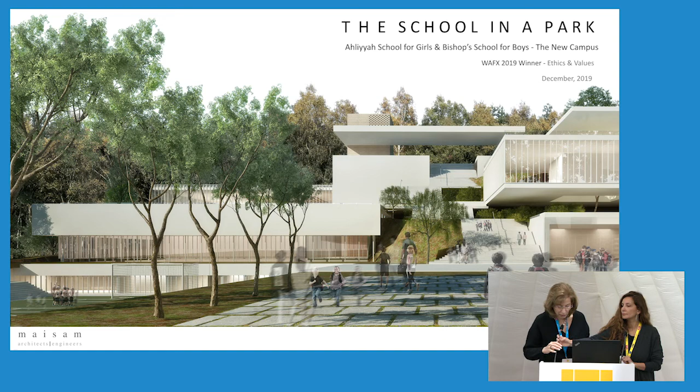It's a merger between two schools in Amman, Jordan: the Ahliyyah School for Girls, and the Bishop's School for Boys. The main driver behind the design has been to create a school that is ahead of its time, aspiring to look into a school of the future that will be the first of its kind in Jordan, and probably in the region. We would like to see how that will take us into future schools.

The two schools hold a significant presence and historic value in the city, as they represent beacons of holistic education and symbols of empowerment. The two schools currently sit in one of Amman's oldest neighborhoods called Jabal Amman, the Mount of Amman.

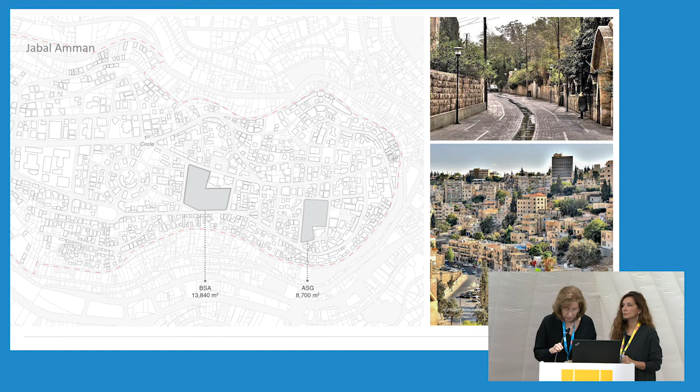The area represents a lot of culture, history, and authenticity with a traditional dense urban fabric, while the new site sits 15 to 20 minutes away within a rural part of the southwest of the city.

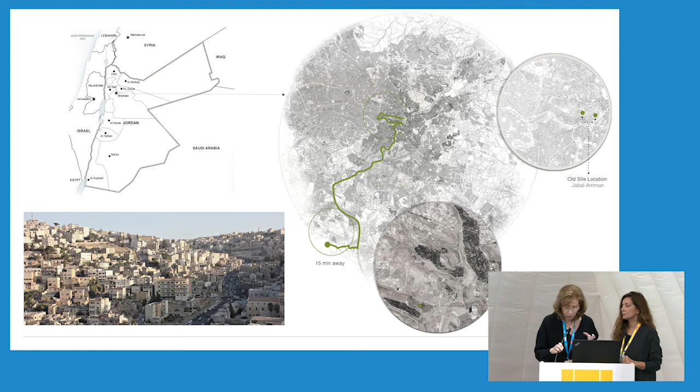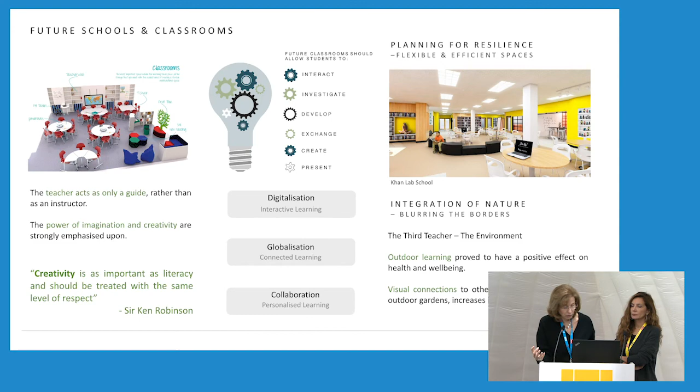We were very lucky to have been approached by a forward-thinking client that is enlightened, bold, and considered a reference in the field of education, believing in instilling the power of imagination, creativity, and collaboration, and considers the school's built environment to be the third teacher, one that allows students to interact, investigate, develop, exchange, and create.

So why are we moving? We are moving to unite the boys and the girls' schools away from heavy traffic in the old city, and to provide a lot of open space.

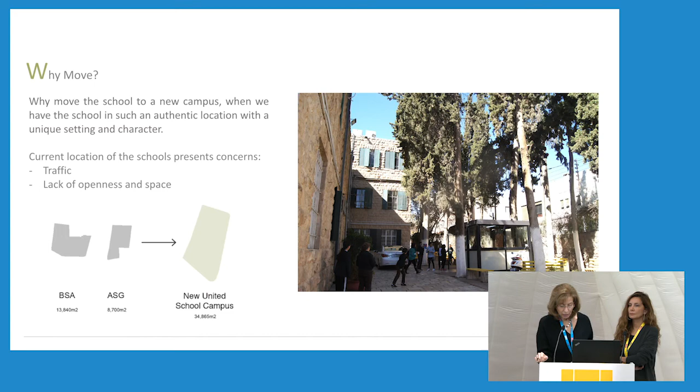One of the main challenges was the emotional attachment of the school's community to the current campuses. So we gave them a promise to maintain the school's identity and values, design a school of the future, create a school in a park, a school the students will call home.

Taking with us the basic physical elements that are engraved in the memory of the place: a stone wall, a tree, a staircase, and a courtyard.

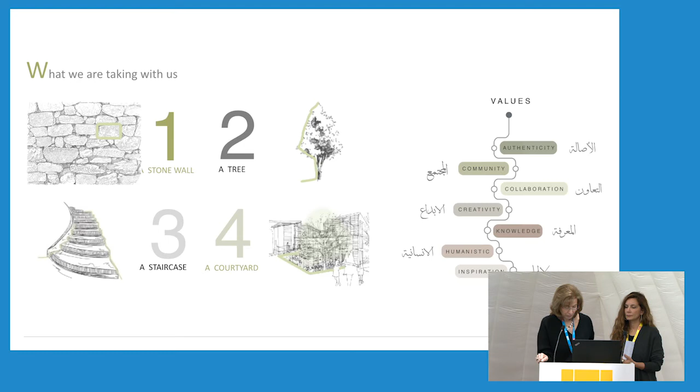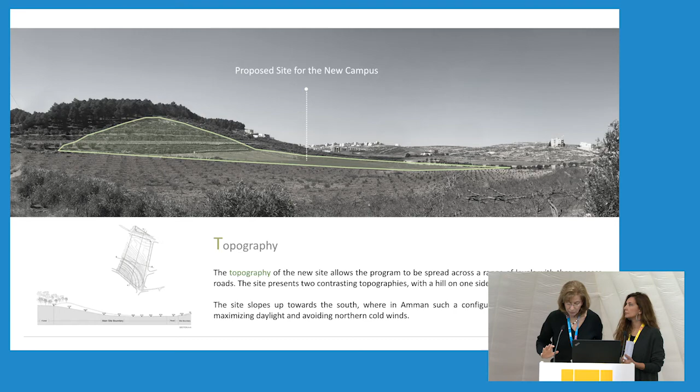The topography of the new site is rather intriguing, as it offers two distinct areas. One is almost flat, while the other is extremely steep with a backdrop of forest pine trees.

The required space program proved to be quite disproportionate to the site area, especially if we were to provide ample open space.

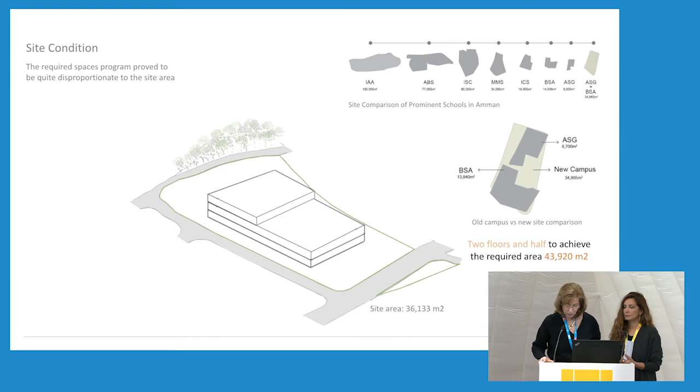We started with spreading the program across the site, introducing pillars that behold the values of the school, elevating the program to draw in the surrounding greenery.

We then broke down the mass into modular courtyard masses that become pods of knowledge that house learning spaces, classrooms, etc., introducing jewel-like transparent spaces in the park that showcase the freedom of expression and innovation.

The pillars of values became the cores that hold and connect the school throughout, to create a school in a park.

So the elements again: we have the park that weaves together an intricate landscape of creative interactive functions, and the pillars symbolizing the solidity and values that the school represents.

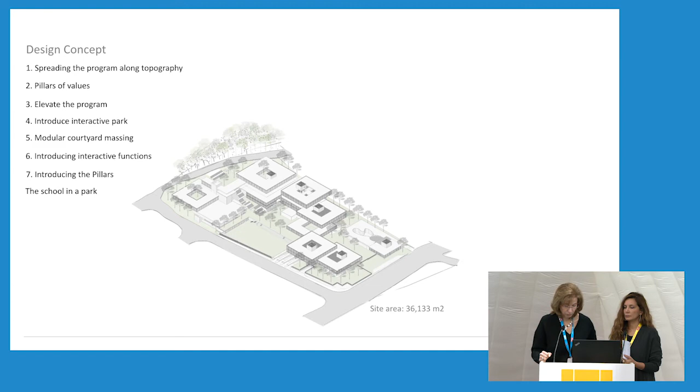The elevated pods of knowledge, and the anchors rooted within the mountain, housing the school administration and all community-related functions. We believe that we were able to create an environment that engages the students, stimulates their imagination, and nurtures their passion.

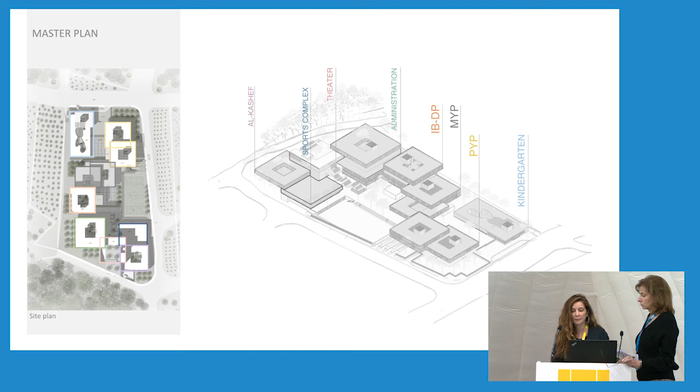The program splits into two categories. The first are the learning functions, mainly the classrooms of the different departments within the elevated pods. The second are the interactive functions placed within the park, creating an environment that lights the spark of curiosity.

These functions are the library, the theater, the design labs, music rooms, art studios, and playing fields.

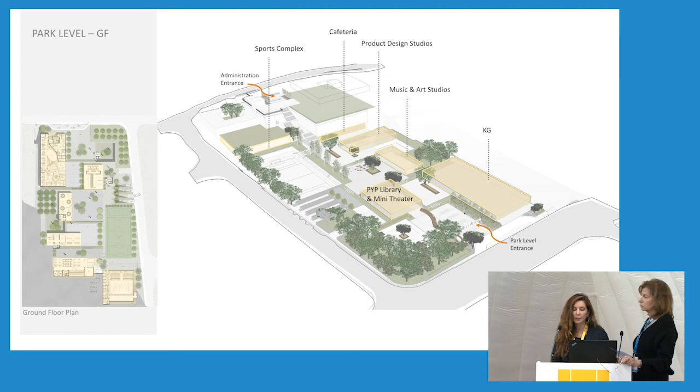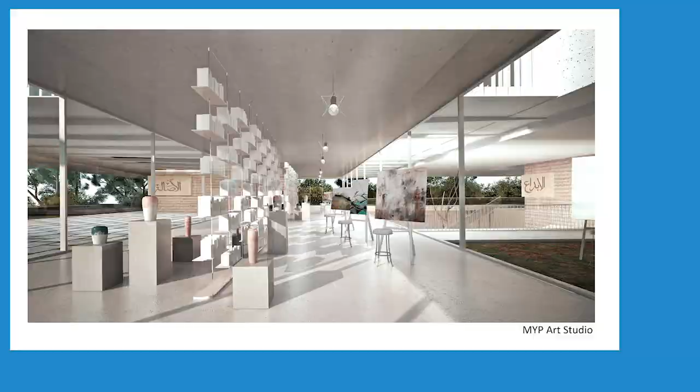Like all parks, it connects you with nature, it connects you with others, and gives you the space to connect with yourself. As you go through the park level, you will witness art being created, products being designed, theater being performed, even students grabbing books from the library.

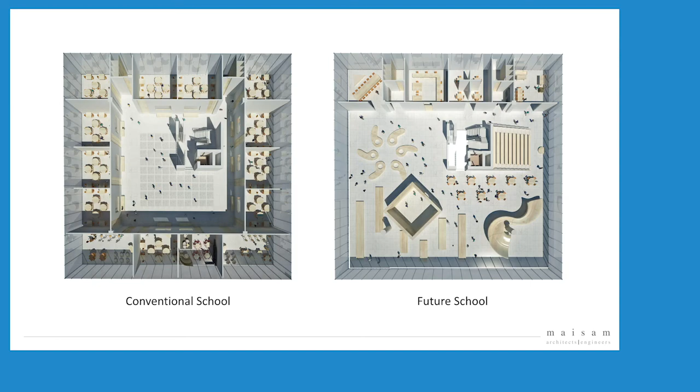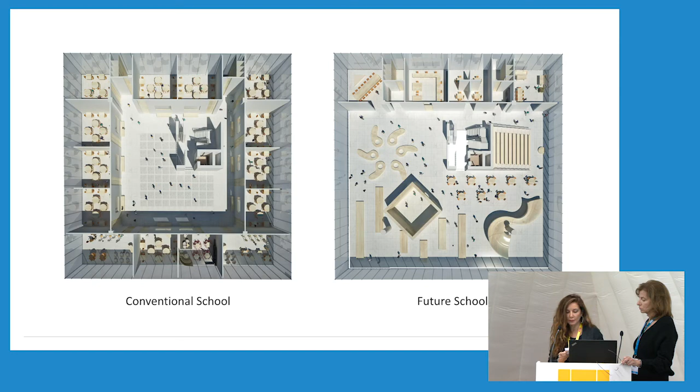It was very essential that the module we adopt for the learning spaces is flexible and adaptable to allow for the future modes of education to happen, towards a no-wall school when the role of the teacher is to stimulate, provoke, and engage.

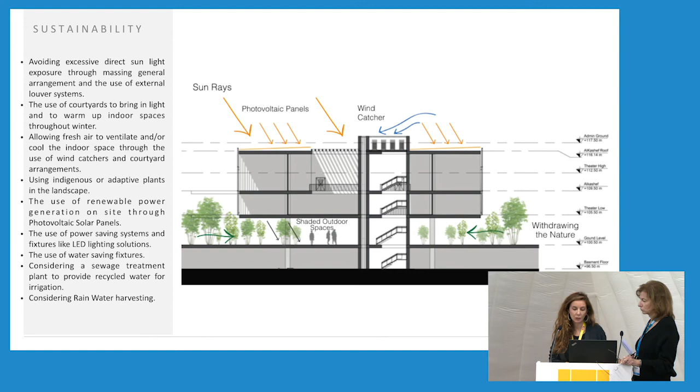Jordan enjoys a moderate four-season climate, so we were able to deploy simple yet effective sustainability strategies that will provide a healthy and comfortable environment. The building orientation, courtyards, natural daylight, the incorporation of wind catchers, shading, using native greenery, reduce the building's use of natural resources. I will leave you now with an animation that captured the spirit of the school.

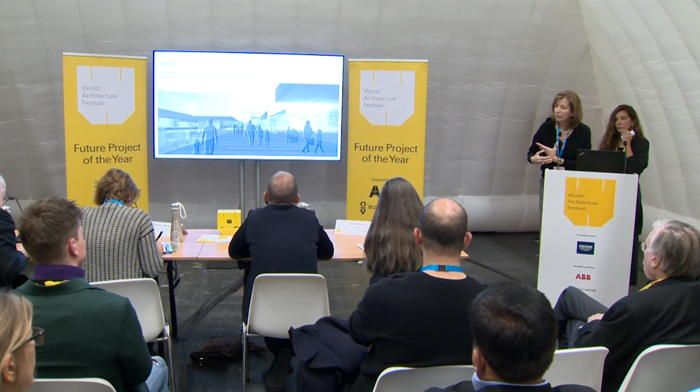The whole world is studying this thing about where education is going, and one of the leading people in this is Sir Ken Robinson. He has a team now working on that, and they looked at all the pillars. They talk about three teachers: one being the teacher himself, who has to shift his role to become more of an enabler. The second is the student to the student — giving them a place to learn from each other. And the third teacher is what we do as architects: how do we create an environment that helps the children of today get off their phones and talk and communicate?

So if you go back to the design, you realize we chose no classrooms on the park level, only highlighting the uniqueness of each student. We feel this school will take us into what we call self-actualization, or understanding your purpose in life. If we can do that for the young generation — help them understand what makes them unique and put it to the service of others — we would have done this generation a lot of good.

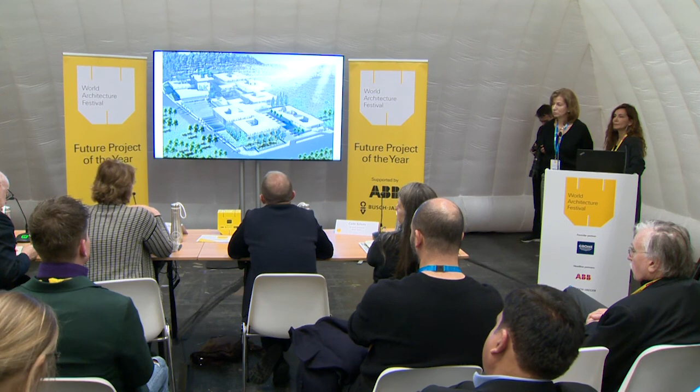Oh, thank you, very nice. I have maybe two questions. Maybe about your three teachers — maybe you can add a fourth teacher, nature. I could imagine, since you said it's still a work in progress, that in your discussion of the roofs you could even combine a green roof, bringing children back, connecting them again with their own senses, but also with nature, even with food production and herbs.

That's interesting, yes. And I have a second question — I can imagine giving a bit more attention to that if possible, because it's already a great project. I was wondering, since you make all glass facades, how does that work with the four seasons? I don't know, I've never been in Amman — do you have to use screens for that, or is there natural ventilation, or is it too much glass? I have no clue.

It's a good question. In Jordan, actually, we say we package the weather. When we want to welcome you to our country, we say we package the weather, meaning we have four perfect seasons. We get snow, but only for about 3 days. We get rain for 4 months. The sun is never too hot — it has a perfect climate.

In this case, you have to remember we worry about heating the classrooms, unlike the rest of the region. That's why you see we opened the courtyards and the masses to bring in the south sun, because the land goes in the opposite direction, so we have to create openings toward the south sun to heat. South is behind the forest, yeah, behind the forest.

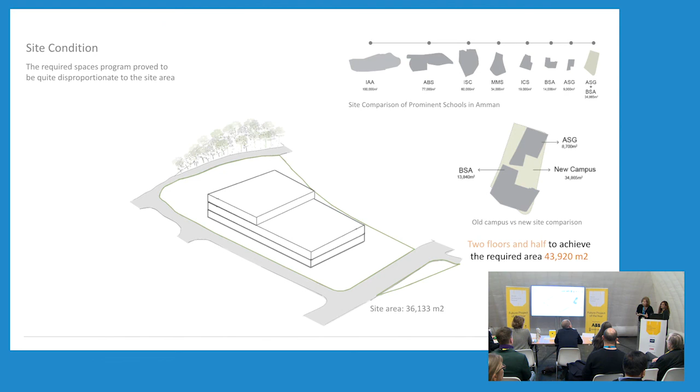The idea is to make them feel nature, even if they are in the learning pods, to be one with nature even there. We don't worry at all about having too much glass, because it's very moderate weather — people even sleep on roofs. It's just a little bit of sun; if it's irritating, a little bit of louvers will solve it, depending on which direction we're looking at.

Okay, well, the time is up. So congratulations again on being the winner of Future Projects Education, and we'll present you with your award.